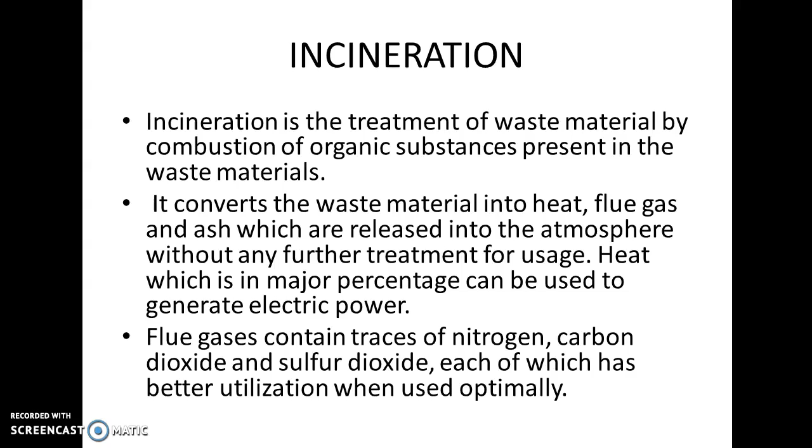The major byproduct which we get from incineration is bottom ash. Bottom ash accounts for around 80 to 87% of the solid residues. So as you can see, the ash is the major proportion of the byproduct of incineration. Some flue gases here will have traces of nitrogen dioxide, carbon dioxide, and sulfur dioxide. So it will have some byproducts which will be beneficial for us and some which will not be beneficial for us.

Let's move on. So it's diagrammatically represented how the incineration process works. It's very simple. You have the solid waste, you dump it in the combustion. Combustion means burning. After burning at a temperature of more than 850 degrees Celsius, heat is generated. Due to heat, steam is generated, and that steam drives the turbine which generates the electricity. So here it is mentioned as energy production.

Here you can see gas cleaning is written, which means that flue gases such as carbon dioxide and some very harmful gases like nitrogen dioxide are generated. Nitrogen dioxide is an irritant gas, so it is very harmful for human beings. So gas cleaning is a must in incineration because it has a disadvantage that it pollutes the environment. Incineration emits more carbon dioxide than a coal-based thermal power plant. So gas cleaning is done in the incineration process. We'll be discussing that later on.

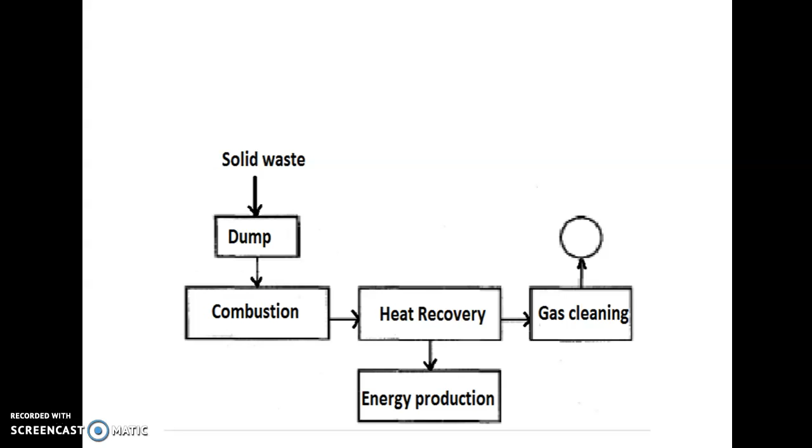So these are the desirable proportions of the waste that should be put into the incineration plant in order to have better energy in terms of calories. Moisture content should be less than 45%. We have discussed that moisture content should not be very high because it inhibits incineration. The organic substance should be more than 40%. Fixed carbon should be less than 15%.

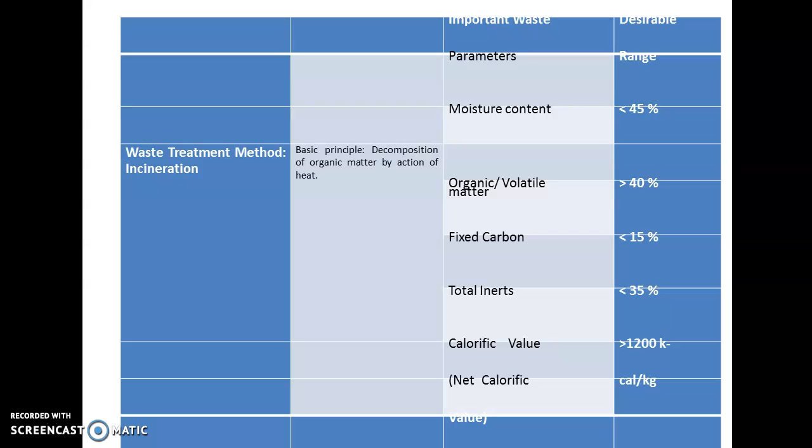So while using this process, we have to make sure that the solid waste we are putting into our incineration plant has these parameters in order to have a good high energy value, so that we can further use it. If the energy value is less, definitely it is not much of use. We will not be able to utilize more of the solid waste energy or the biomass energy.

This is the incineration process. You can see here that there is a hook. It is putting solid waste from here to here, and you can see a furnace in which burning of solid waste is taking place. When burning of solid waste takes place, hot gases occur, and these hot gases and the steam generated are in turn used to generate heat and electricity, and then used in boilers.

So we have different points to be discussed. Let's begin with the combustion. Here you can see the combustion. Waste is continuously fed into the furnace by the overhead crane at a temperature more than 850 degrees Celsius for more than 2 seconds, with sufficient supply of air so as to ensure complete burning of the waste and to prevent formation of dioxins and carbon monoxide.

Secondly, as you can see, it has a boiler. It is written over here: boiler. The heat that is generated from the combustion is used to generate steam in the boiler. The steam then drives the turbine, which is coupled to the electricity generator, and hence it is used for electricity generation, which is very much evident from the picture over here.

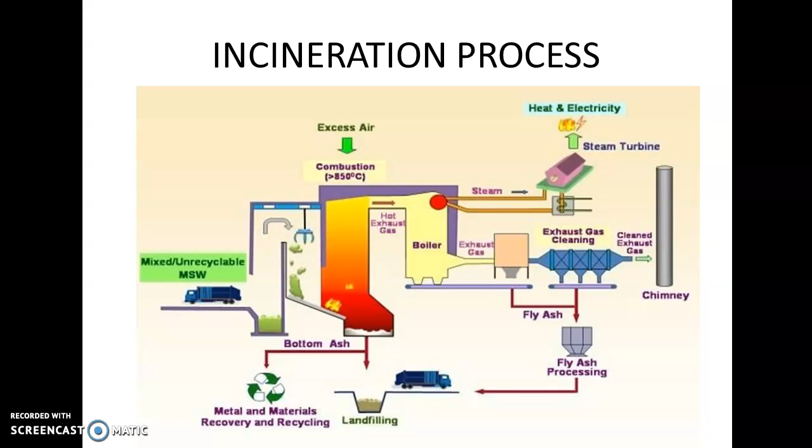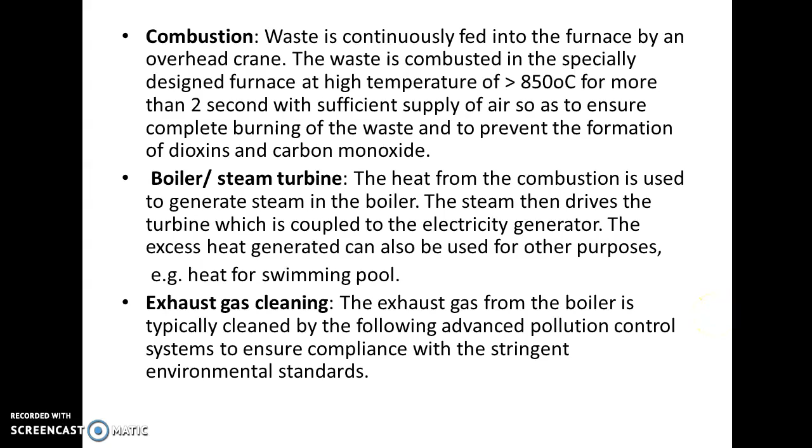Then we have certain terms such as activated carbon injection and dry or wet scrubbers as well. You can read it from here also: combustion, boiler or steam turbine, exhaust gas cleaning. The exhaust gas from the boiler is cleaned by the advanced pollution control system. Further, we have dry or wet scrubbers. They remove the polluted acidic gases like sulfur dioxide and hydrogen chloride coming from the boilers. And then activated carbon injection removes heavy metals and organic pollutants in case there are any.

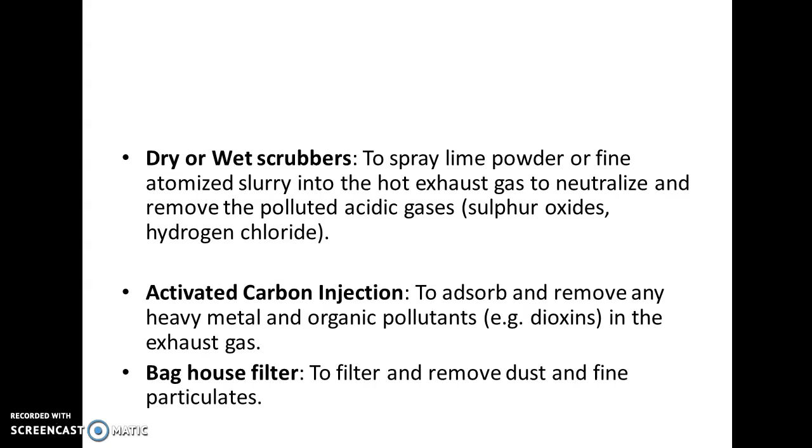And last is the baghouse filter. You may not be able to see the baghouse filter because it's not a 3D image. Basically, it filters and removes the dust and fine particles from the gases. So this is the whole process of incineration, how it takes place.

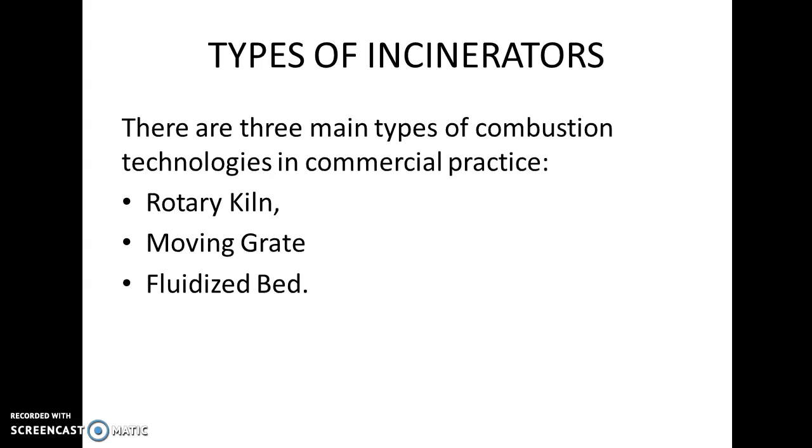In this recombustion chamber, which is at the rear of the kiln, the decomposed air and the rest of the waste is completely burnt with the supply of secondary air. Basically, we are again burning the waste with the help of secondary air. So the process is done twice: initially it has an inclined pre-chamber where it is decomposed, and then we have a recombustion chamber positioned at the rear end, decomposing with the help of secondary air as well.

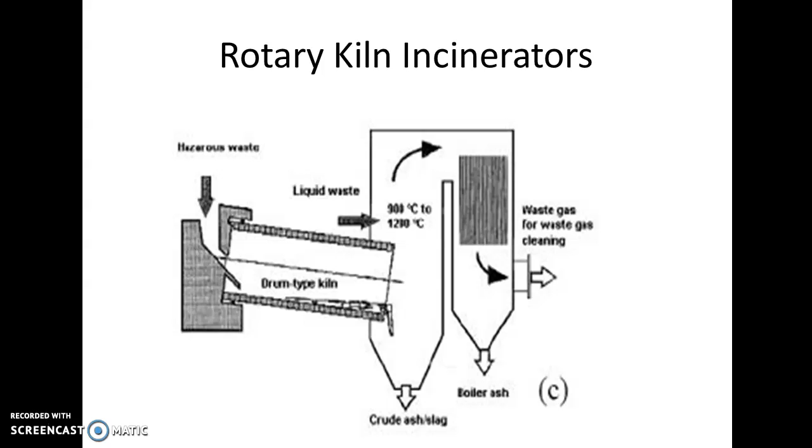So it has the advantage of producing a low level of nitrogen oxide (NOx) and thermal destruction of hazardous chemicals. So it will have a reduced effect. Like we have seen in the incineration process, it's one of the incinerators which has this advantage.

Basically, waste is dropped by a crane onto the descending grate, which moves into the combustion chamber, and then eventually moves down to drop the burnt residuals into the ash pit at the other end of the grate. The moving grate, material-wise, is a metallic porous bed allowing primary combustion air.

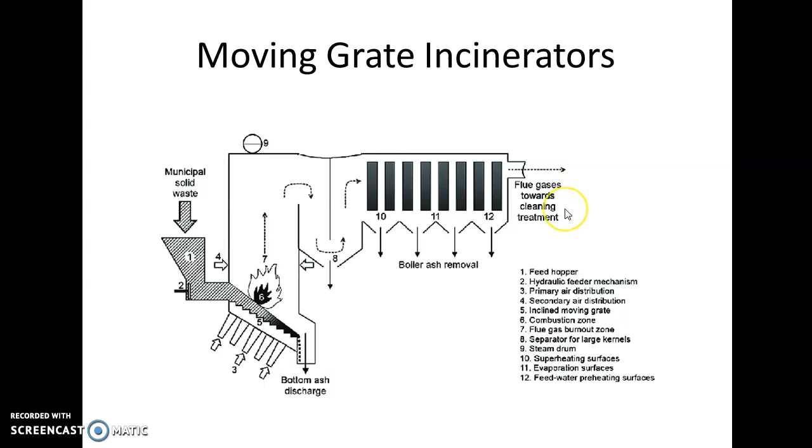So this is the moving grate incinerator. Next is the fluidized bed incinerator. It is suitable for industrial and sewage sludge incineration processes.

The principle of fluidization is the process where a granular material in a solid state is turned into a fluid-like state by passing a fluid, a liquid or a gas, through it. As the fluid passes through the granular material, the drag forces overcome the force of gravity, and the material expands as particles move apart. Eventually, as the material spreads further apart, velocity slows, and gravity overcomes the drag forces, causing particles to fall back down until they begin to fluidize again. So given sufficient velocity, the particles remain suspended or fluidized and exhibit fluidic behavior.